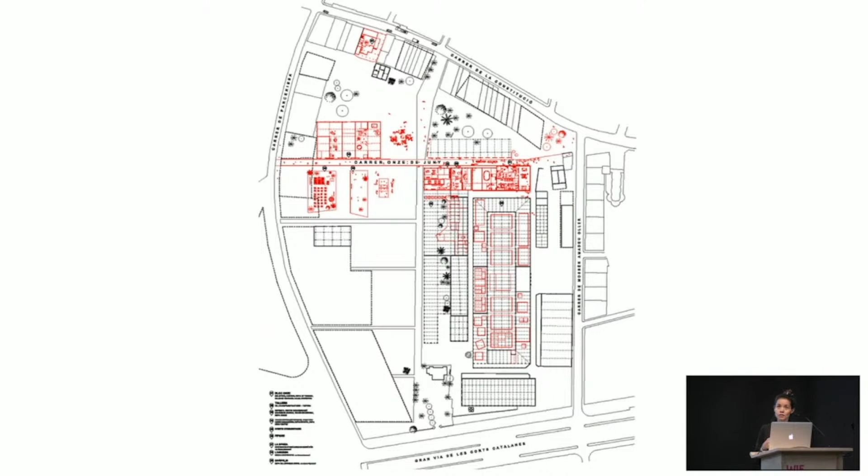And with that, it's the first kind of spaces and projects, initiatives that were colonizing this huge area, which was also in a change from the private to the public, just waiting for the public to have the resources, the initiative, the ideas to start doing that.

It was an opportunity for us to understand new protocols of understanding the provision of architecture with the people, the skills, the materials, and redefining needs and programs. And basically it was also the seed to understand how Can Batlló could become a cooperative neighborhood.

It was also a moment where, precisely because of the dismantling of the welfare state in Spain, in the neighborhood there was a movement and different projects trying to understand how we could bring solutions from the cooperative sector — in a way, how we can solve individual needs through a collective response. It was the opportunity to bring to practice, in the realm of Can Batlló, all those ideas.

So that's why when we were talking about housing and the policies, we were in a state that was basically in between the market and the state in the production of housing. So within the context of the cooperative sector, social economy, and the community, we were trying to build this idea of the third sector also as an agent, this idea of citizens as instigators of this new emergent model of cooperative housing.

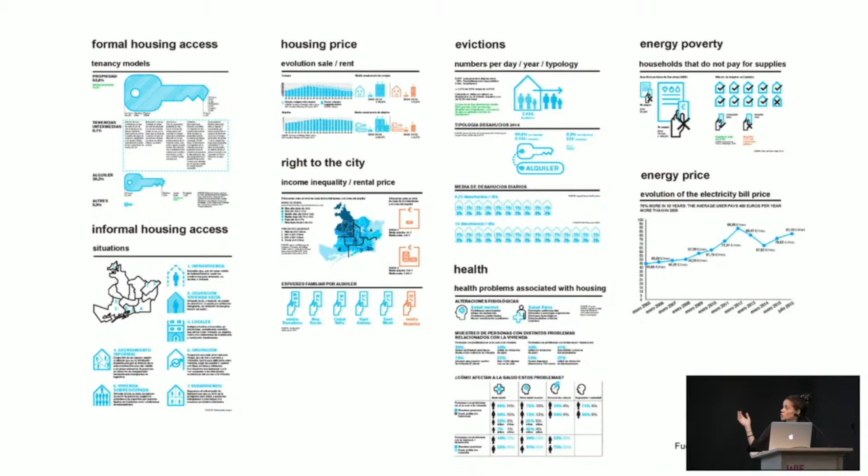Basically, and I'll try to go fast, this idea of this new cooperative housing model—it was a model of cooperative construction of housing. Once the housing was finished, the cooperative was closed, the property was divided, and it became just private housing. That's why we call it a new cooperative housing model based on collective ownership.

This is precisely the key point in our context: people as inhabitants, as members of the cooperative, have the right of use—an unlimited right of use of one apartment—but cannot speculate, because the owner is the co-op.

And the co-op is a non-profit co-op, which is also a mechanism that allows cooperative housing to develop public land in the city. And this basically had as a consequence, or as a potential, this idea...

That this is not speculative, it's led, or at least has started to be, a model led by the community—affordable, and trying to be as inclusive as possible in every kind of development and initiative, sustainable in the broadest way I was presenting, and replicable.

The idea was we don't want to generate just a project in Can Batlló, for example. We really want to understand it as a model, to see that there is a political impact of each decision, from the funding to the architecture, and really want it to be something that can be adapted to different contexts, different communities, and different parts of the city, even the Catalan or Spanish context.

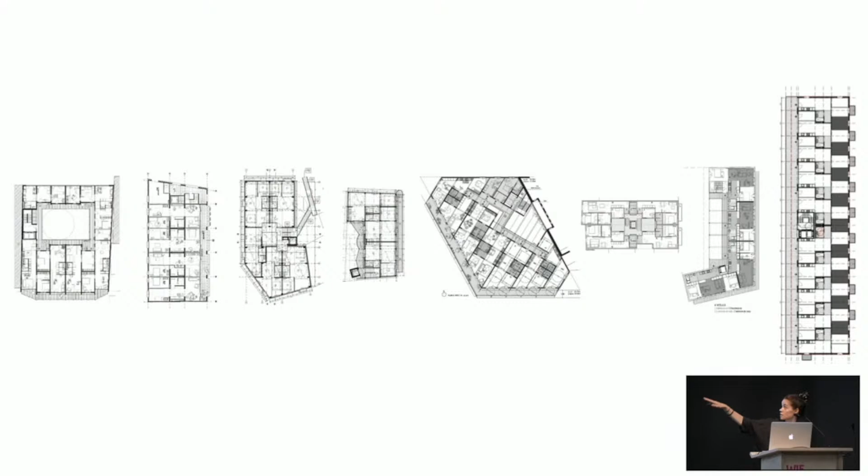And so this was how we entered into this idea of cooperative architecture. And basically, through the process of La Borda, which is what I will present, is the opportunity to understand a space of innovation in the production of housing. And this is something that with the same values, we had the opportunity to develop different variations. I think this is La Borda, and these are the different housing projects we are developing, but they're really based on the main ideas, which are totally linked with this idea of the model: self-development, collective ownership, community interaction, sustainability, and comfort and affordability, and how we can give a response from architecture.

And the first point, crucial and different from the typical procedures to produce public housing, is that we know the user and they're involved in the process. This is key to really challenge regulations, standards, and mindsets. And I think without this point, it would not be possible to really build La Borda as it is.

This idea of an open infrastructure, following Habraken, is like a support that can change through time and adapt to the community, offering different typologies and different programs even through time. The idea of a new program, which in Barcelona was something totally new - we didn't even have a laundry - so it was a step forward to start imagining certain common areas.

A process of awareness, like how people in this process are more aware of how we are living, the environmental impact of all these actions, and how we can be critical about the construction, the use, the lifespan of the building, and this idea of an active user with a passive building.

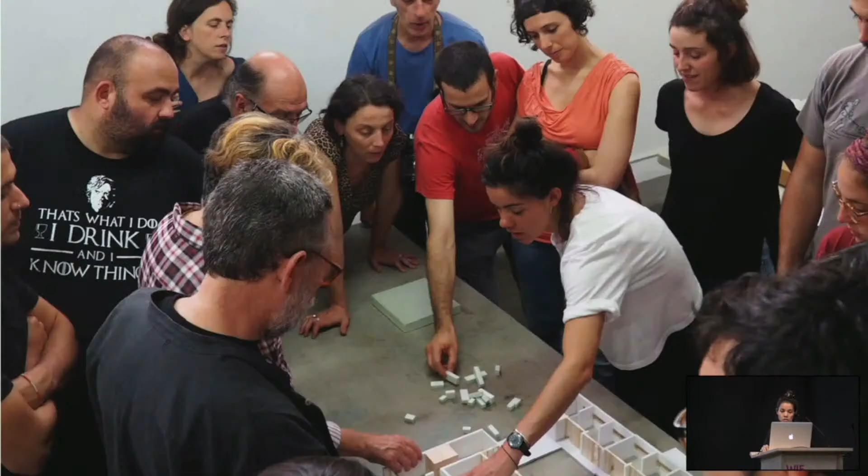And this was key also to really decide and do what we did. So establishing these new tools, these new spaces, the language, the models, and how we can also move as architects to new formats.

Starting with a survey of the context, the user, understanding the real need, and how can we redefine the conventional user of the family prototype for collective housing, and also how we can understand the economic impact of housing and energy.

This is part of this process of discussing continuously the priorities and strategies of the building, from a flexible housing system to a really passive building to reduce the energy cost, and other data that was crucial, like mobility.

We managed to change the regulation of parking after a huge amount of work with the technicians of the administration. So also this idea of the responsibility to push for certain regulatory changes that has an impact beyond a single project, to the city.

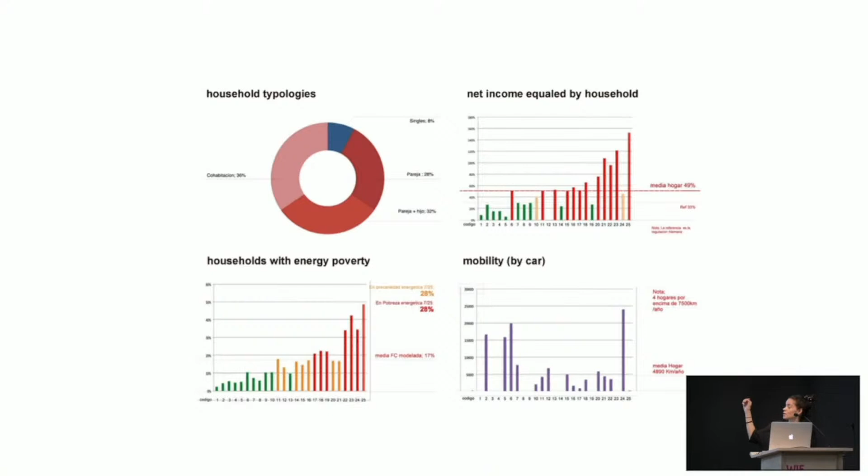This was basically the idea: to reduce the impact of the construction of the parking, to have more budget to really invest in other parts of the building, and also provoke or promote a more sustainable model of mobility.

And this idea that we have a specific surface, how we can distribute it, and how the appearance of these community spaces and community areas is also affecting the characteristics of the housing.

So we are not building fewer units, we are maybe building a bit smaller, but because we are collectivizing services and parts of the program. This is also part of this strategy of reduction.

And when we are applying a laundry, and I will talk about this at the end, when we have a laundry, for example, we are reducing the consumption of energy and water.

We can be more aware of certain practices, and all these reflections from the program to the construction were part of the environmental goals of the project.

And because of the budget, we really focus on energy, the reduction of the energy demand, and the reduction of the materials, as something also really visible as a new way of building.

And just entering the building. This is a process that is really present, and we are doing it again and again with each community, with each urban plot. I think the process is being replicated in a way.

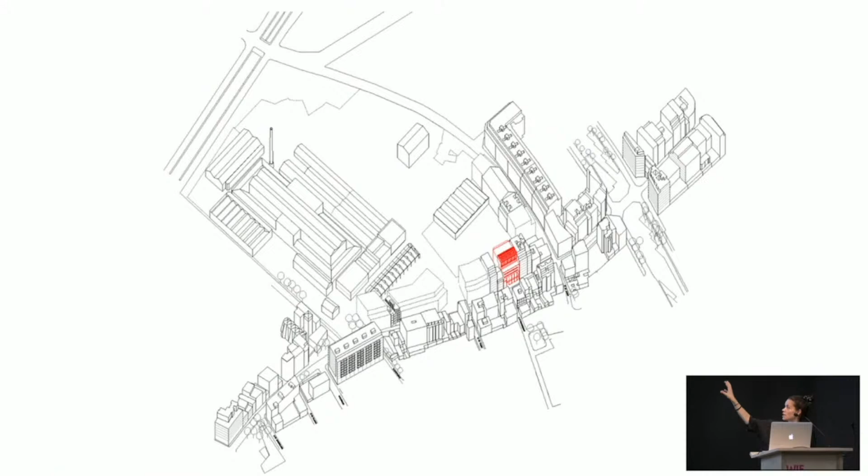And when we arrived to La Borda, this industrial area, it was again this idea of which spaces do we have in the neighborhood and in the area that we cannot duplicate or replicate, and which spaces are part of these different levels of community.

This idea of understanding the building as a transition from the public, even opening a public passage to really connect the future area of Can Batlló, organizing the common areas in the ground floor and first floor on the north facade, and then arriving to the most private areas and the units in a building which was really deep, 24 meters, so this need for a courtyard.

But it also became the core of the community, in a sense of belonging in a social way, but also as an environmental device.

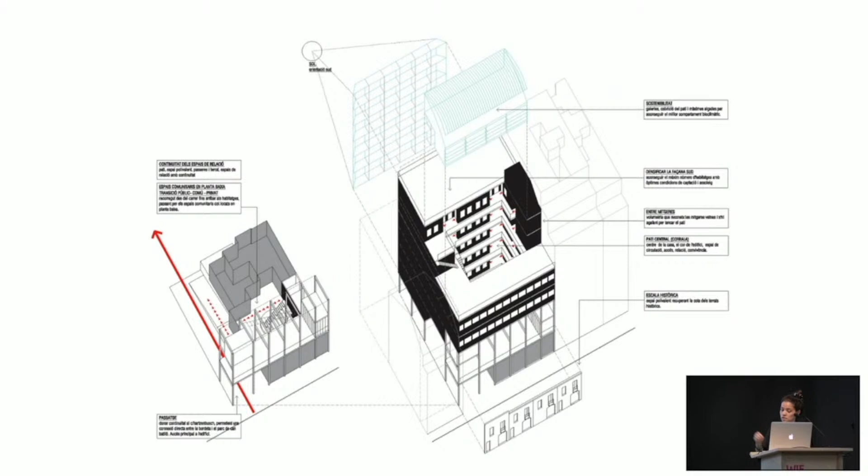Once we close it with this greenhouse, this also became a collective energy saver device, which was reducing the envelope of the building, making it more compact, which was also a reduction of cost, and also making all the spaces in different levels and floors easy to appropriate all over the year. And also this idea of densification of the south facade, and understanding the transition in terms of publicness in the north facade and the facade to the street, but also allocating the flats in the upper floors to have maximum comfort.

So this kind of unbalanced section with 24 out of 28 units in the south facade, and 2 more in the upper floors, and this idea of a device that's the core of community activities, circulations, and informal relationships, but also a space that has a climatic behavior, helping in summer and winter to reduce demand and increase ventilation.

And it generates different spaces of comfort, from the common areas to this multi-purpose room, to arriving at the terraces and upper floors.

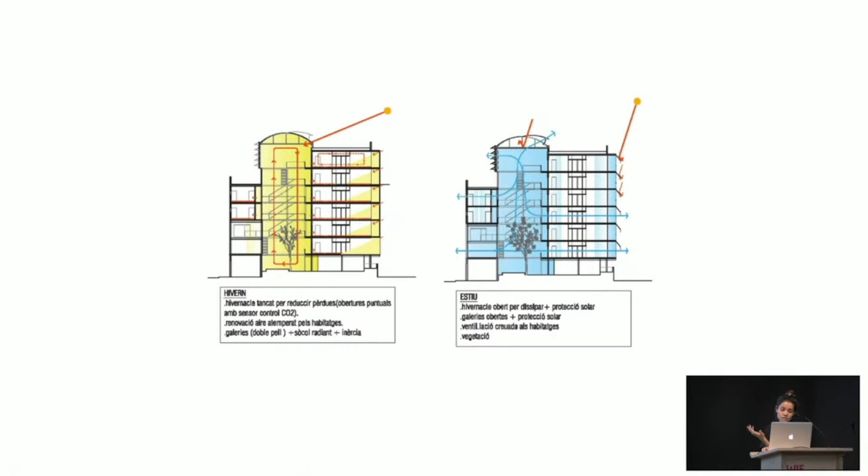So once the strategy in terms of volume in the city and environmental performance was defined, the last part of the design was establishing how we would define the typologies. The idea was to establish a matrix of non-hierarchical spaces that can be interconnected in different ways, generating several typologies using a kind of legal tool.

But this was also something that allows the cooperative to manage it through time, to change with simple mechanisms the configuration of a housing unit, which in the regulations and bureaucracy of Spain is quite complicated.

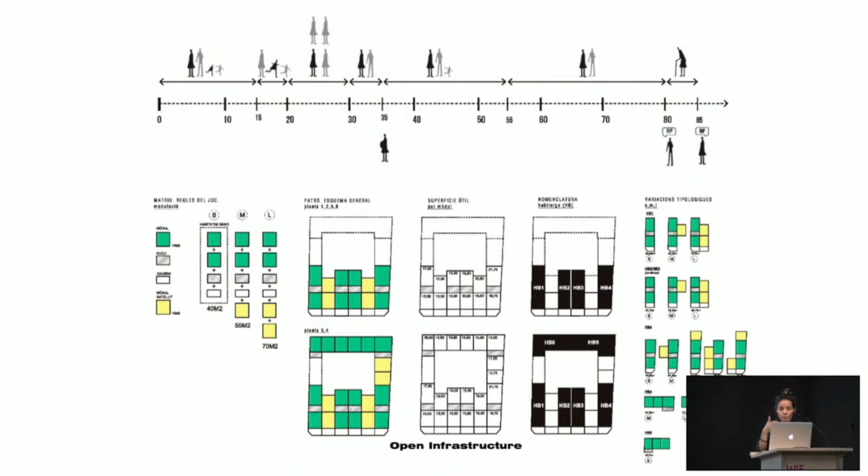Once this matrix and system was defined, it was a matter of establishing different levels of participation: the position of the installation core with the bathroom, the position of the kitchen, and then the users will use the spaces based on their specific needs and programs, through slight elements that they themselves provide, regulated by a manual that we discussed with them.

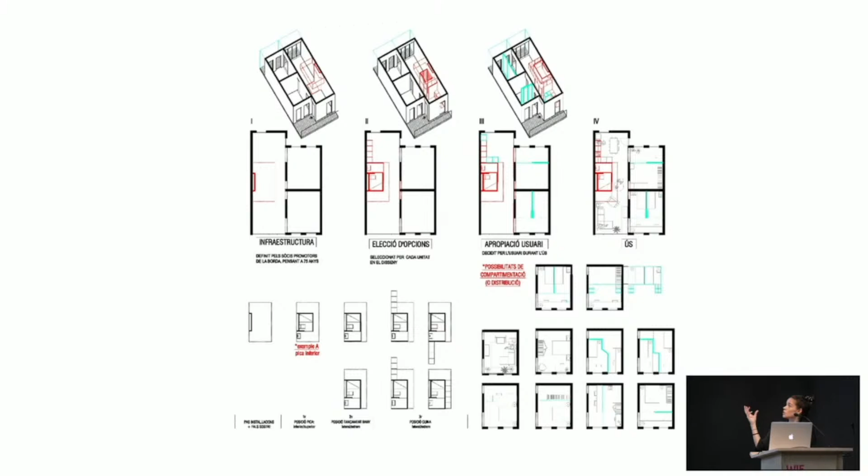So we set certain rules to define this naked infrastructure and these different levels of appropriation and participation, and also a strategy to really reduce the cost of the interior layouts.

And here it's how we arrived at this kind of collage of different typologies, different units and configurations, with a quite systematic structure, where the typology system became the structure itself.

And here it was part of this idea of sustainability and responsibility. The cooperative really wanted to show that another way of building was possible. It was a mandate for us to work in different scenarios, from concrete to steel structure to wood, and with a really low budget, to try to propose a CLT structure.

Basically, because of these domestic spans, like 3.6 meters, we defined 12 centimeter wood walls and also slabs of 12 centimeters. Once the structure was defined, also taking into consideration that the typologies can connect or not, it became a system of openings and walls.

Once the wood was defined, the distribution and the building were defined. It was also an opportunity to understand when we can reduce the insulation, because there's no thermal connection between the terraces and the facades.

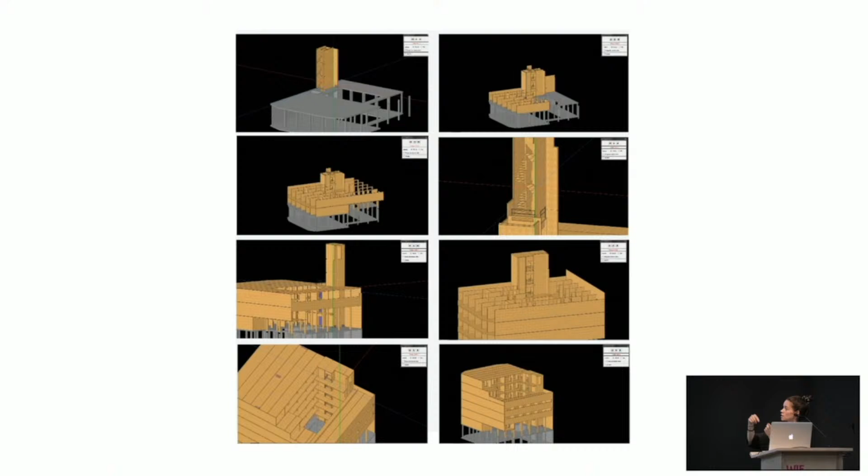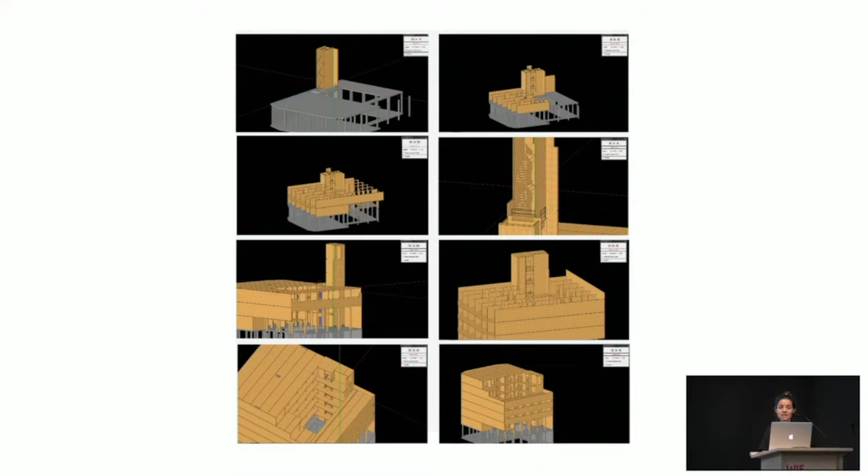So it was also a way to understand how we can build in another way, because we use this material, and with this kind of economic detail approach, we can build a project like this at 850 euros per square meter.

So basically the idea was to invest in the structure, in certain elements, but then use technologies and systems that we know are cheap and affordable, from Lacaton Vassal and other references. So this idea of beauty and aesthetics is totally linked to the idea of affordability.

And basically just some images of this ground floor with a cooperative of organic food, also a project of the neighborhood, this public passage that will connect to the park.

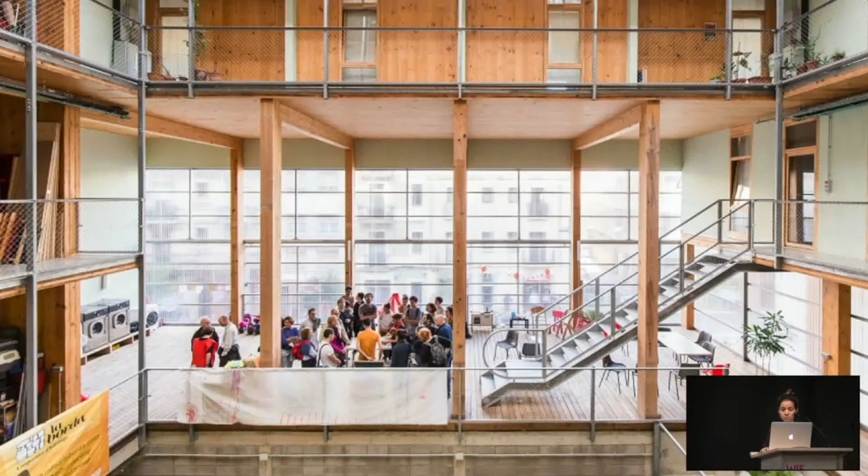And also we start to see this multi-purpose room that, in summary, is totally linked with the public realm and the city. This courtyard with all the parking bikes behind us is the condition for not having underground car parking. This connection of the common area with the future park arrives at this multi-purpose room, the future laundry, reflecting this idea of non-finished construction and phases.

So this also challenges a bit the idea of what a finished building is. It's present in the building as a process of finishing through time, and also as a way to learn the real needs, and to be really active as a community in order to understand if something has to be changed, doing maintenance, and even adapting certain previous decisions.

So this is the future laundry, the guest rooms on the first and second floor, arriving at this connection through the courtyard, to the terraces and spaces inside, because these areas inside the greenhouse are quite warm in winter. So there are different spaces with different conditions of comfort throughout the building to move through even during the year.

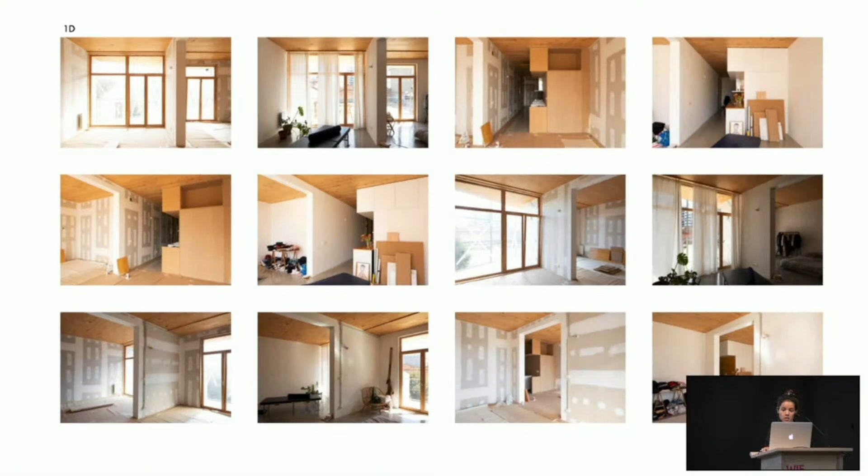And when we arrive inside the flats, there's this idea of naked infrastructure and really simple detailing - basically just concrete for inertia and mass, also because of fire and acoustic regulations, with different layerings of wood in all the walls. But we have wood in the ceilings because it has this hygrothermic comfort, and in Barcelona the humidity is really present. It's regulating, and the sense of a drier environment is really present, so it helps a lot.

And every user was finishing, painting and finishing these spaces themselves, so they became super different. This is just one example with the kitchen in the middle, and this relation with the south facade with really simple systems of shadow - this idea that the user has to open, ventilate, move the curtains - arriving at this south facade, which is quite different from the north facade.

Also with this idea of Barcelona and the blocks of Barcelona with a quite urban facade, but then an interior facade full of galleries, balconies, which is something that we really like. But suddenly the south facade is the facade to the park, so it was kind of the rear facade, but it's becoming the main facade of the building.

And just to end, I wanted to mention the last point - I'm almost at 30 minutes. So as learnings from the experience, we talk about a cooperative housing model, about cooperative architecture as a learning process, but the conviviality is what brought this idea of cooperative practices as the possibility to establish different protocols for sustainable living. And it was the opportunity to compare the different simulations we did of the building in the design phases and how they really reduced the energy demand and the energy cost.

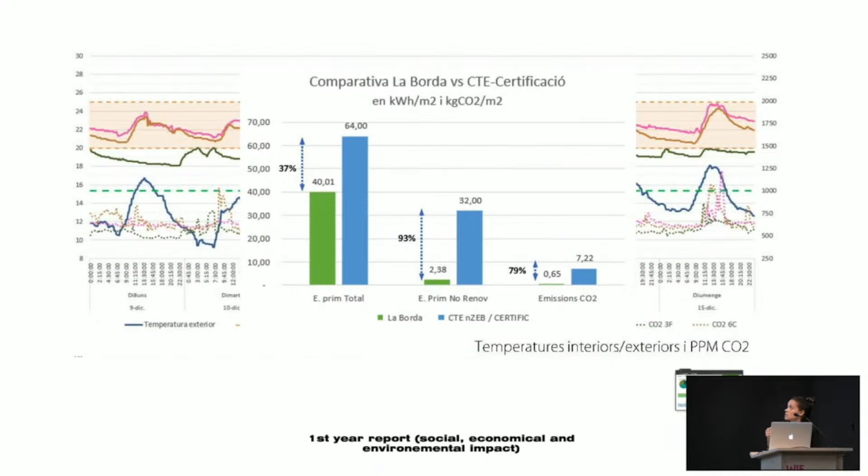And as I was saying, with the laundry, it was obvious there was an understanding of the process of using them, of analyzing how we can reduce the water, the energy, et cetera, consumption - even the temperature of the water, which was the highest consuming factor, the temperature of the water.

So this idea that we have the data, the information, and the space to decide and apply these kinds of measures. And suddenly arrived also the finishing of certain common areas, new protocols of use, and starting also to understand the impact in terms of consumption - the food, the production, the energy. So every time, more and more, the community became stronger.

And then COVID arrived. And suddenly, and I will end with this video - I will take the sound, probably.

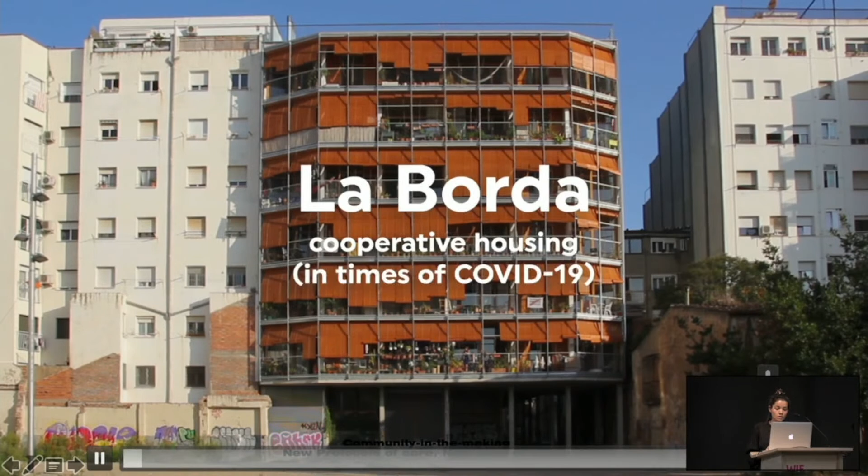The most interesting thing was to see how the community was able to establish new protocols of care, and how the building, with a connected terrace and common areas, allowed certain levels of relation with safety. The community felt absolutely privileged to have control of the environment that surrounded them.

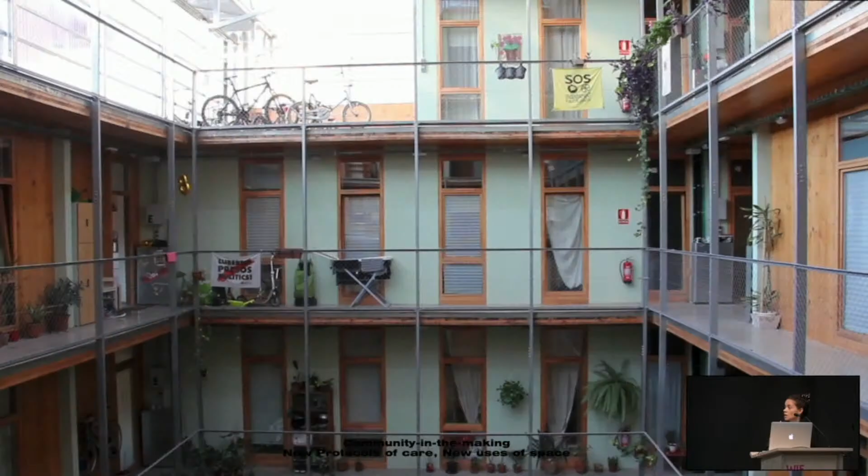Because in Spain we had a super strong lockdown. All families had to be at home for three months, kids without any kind of relation with the outdoor. So suddenly La Borda decided to understand a household as the building and develop their own protocols of care, solidarity, helping elderly people, helping people with specific needs, but also kids. There was even a project of a smaller school to allow parents to work at the same time, this idea of conciliation, which was difficult.

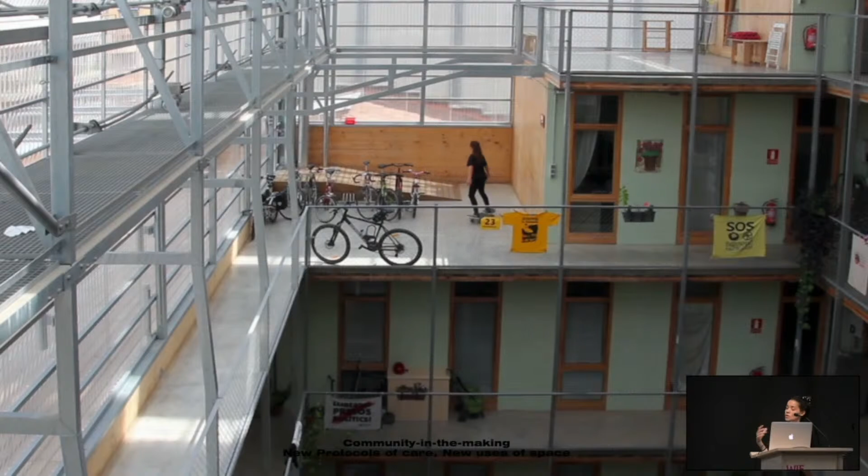La Borda became a gym, or even a concert hall where people were playing music, or became a space for dinner with distancing, but with this kind of social interaction. So it was interesting to see how the building behaved in this context. And I think that with that, I'm finishing.

This idea, the vision of La Col, understanding that these are learnings and modes of operation being applied in different spheres. The idea of understanding housing as infrastructure has also been applied to spaces of economy, an incubator of social economy led by the community, spaces of work in the city, of culture. So I think at the end it's about understanding how we can develop projects and initiatives from this social engagement. Thank you very much.

Thank you very much, Cristina. It was quite a lovely story and a lovely finish, showing how in times of crisis like COVID, it showed what the project actually is by definition of a household, and the whole building becomes, by definition, a household. I also liked the long story in the beginning, the diagrams showing how constructing this one building of cooperative housing actually constructed the whole policy of cooperative housing, which of course takes a long time. So I think we'll have a lot to talk about later here on the podium.

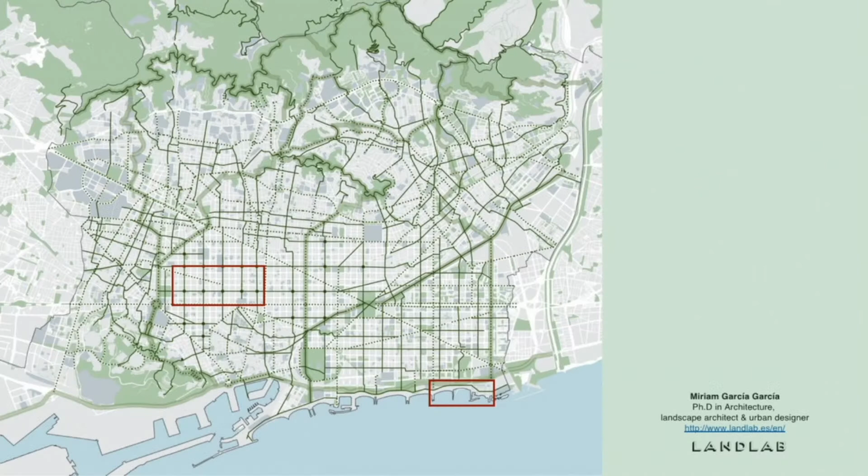Good evening, and thank you for the invitation to join this challenging discussion. I am going to share with you the process and implementation of two large-scale public space transformation projects in Barcelona, in which we are involved. Both are linked with the general title of the series, Klimawechsel, as a fundamental alignment shift in the design of public spaces by incorporating a long-term social and environmental agenda.

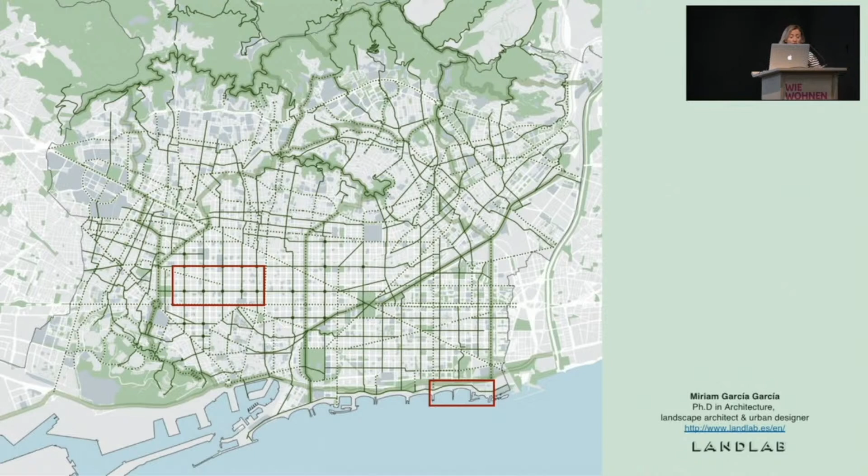So I am going to talk about the superblocks and also about the last area of the waterfront of the city of Barcelona, projects that are now in process. I imagine you have all heard a lot about the superblocks in Barcelona, but I just want to make a super quick introduction. First of all, we need to know that Barcelona is really a small city, 100 square kilometers and really dense. We are 1.6 million people, so it's three times the density of Vienna.

Barcelona is a city with really small and medium parks, but not large parks. The percentage of green space is 6 square meters per inhabitant, when the World Health Organization recommends more or less 10. So I would say that Barcelona is really a city of streets.

Many cities are trying to rethink the idea of superblocks, but superblocks are also linked with the density and urban framework of the city of Barcelona, and that makes sense. So from the very first beginning, the idea of the superblocks was something simple, just trying to transform the city into a green grid.

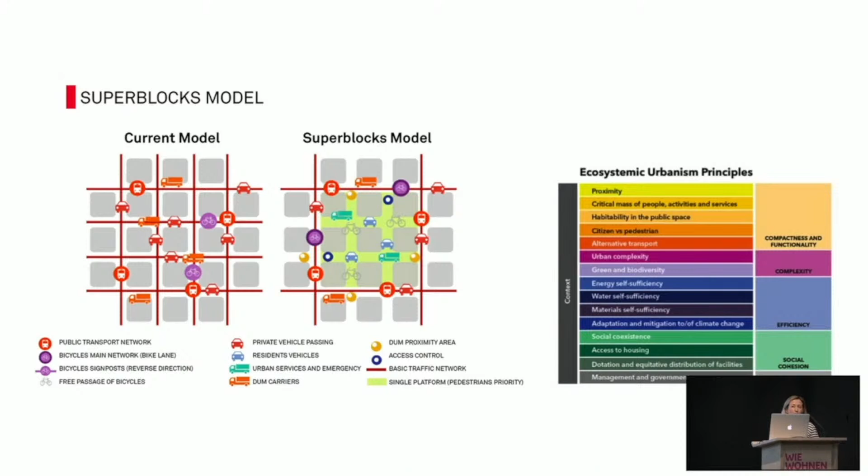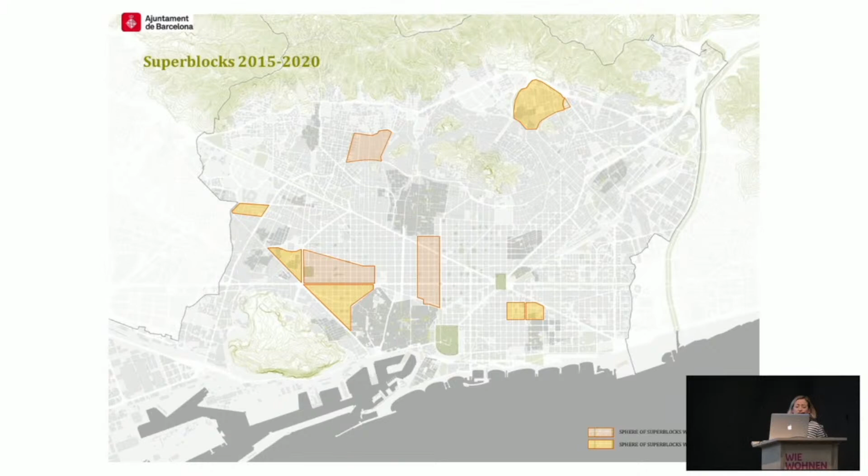And now, in times of systemic crisis of the planet, when we need to face climate change and biodiversity loss, it's also about trying to balance the metabolic behavior of the city. So this is a long story that started many years ago, and this idea of the superblock was tested in some areas of the city of Barcelona through this kind of successful tactical urbanism.

I have to say that I was not engaged in this part of the process, but I was living in one of the neighborhoods in Poblenou, and also my office was there.

At the beginning, people, I would say not everybody was happy with this idea of taking the cars away, so there was a lot of discussion and hard work from the city council in order to explain what was behind this idea of taking cars away and giving the city back to the citizens, but also the necessity to reintroduce and renaturalize the city.

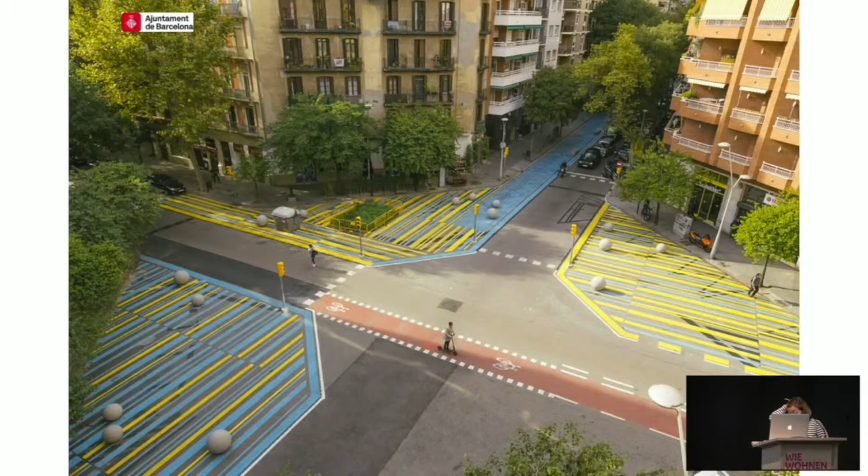Luckily, or not luckily, when COVID came, people realized the importance of public green spaces in the city. So after COVID, the city of Barcelona decided to move this idea of the superblocks from the tactical urbanism phase to the constructed phase.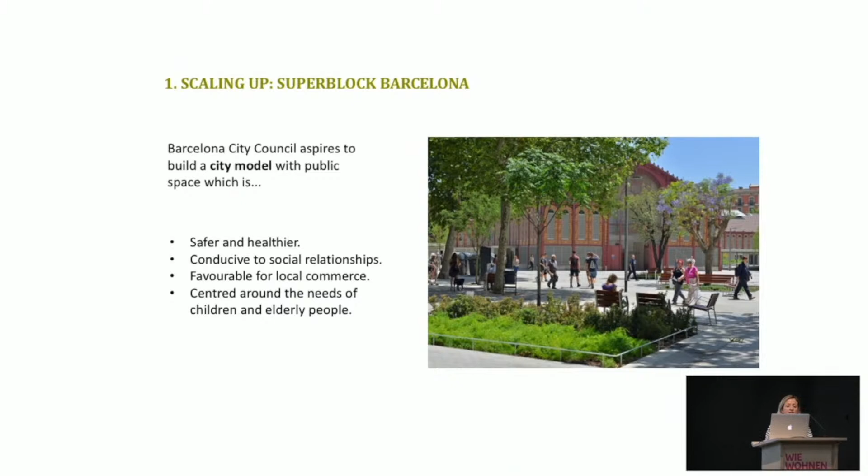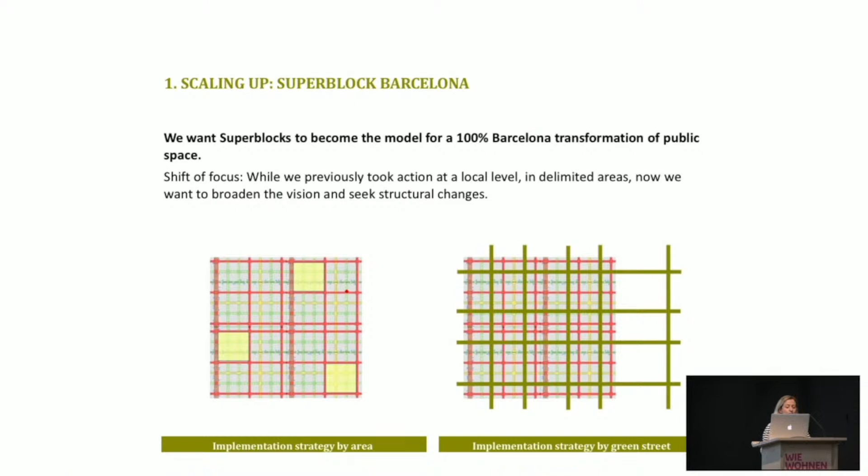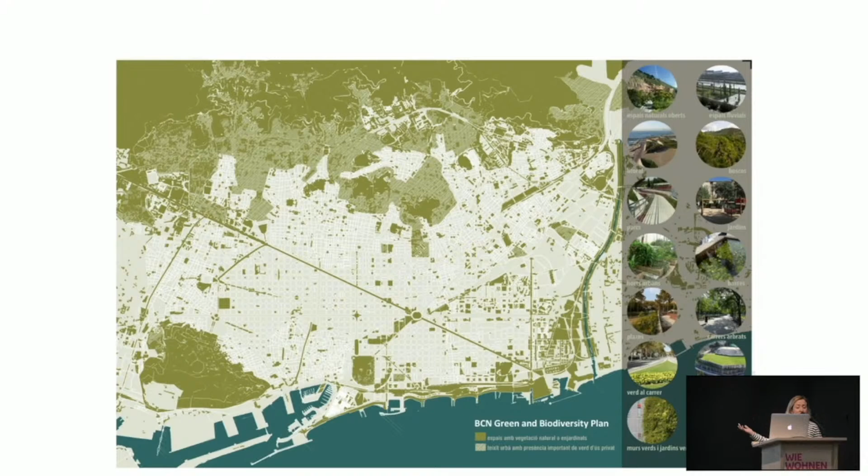But first, in order to do that, they decided to scale up the idea of the superblock of Barcelona. It was not only about the superblock, it was about the whole city. And in order to do that, this idea of the superblock was linked also with the green and biodiversity plan of the city of Barcelona, and also with the mobility plan.

So some of the main axes of the streets were chosen to be transformed into pedestrian streets. As you can see, from the ideal model to the reality, the superblocks are not all the same size, they don't have the same dimensions, because they are also trying to become green corridors, providing a kind of matrix of ecological and biodiversity support for the city.

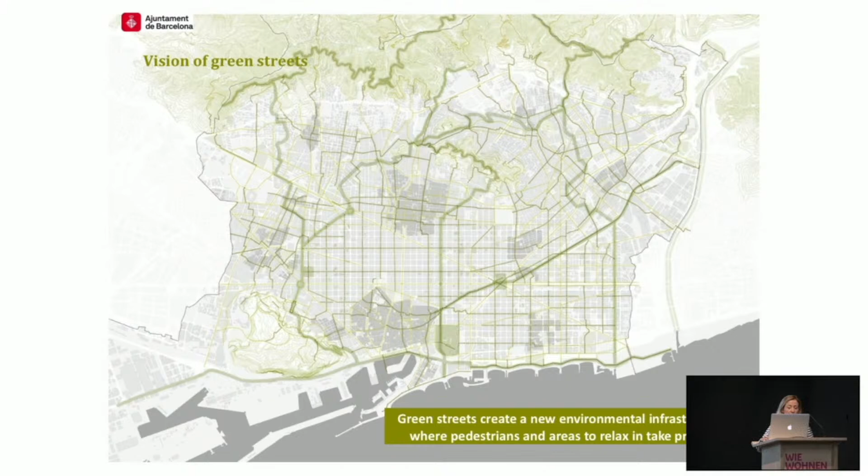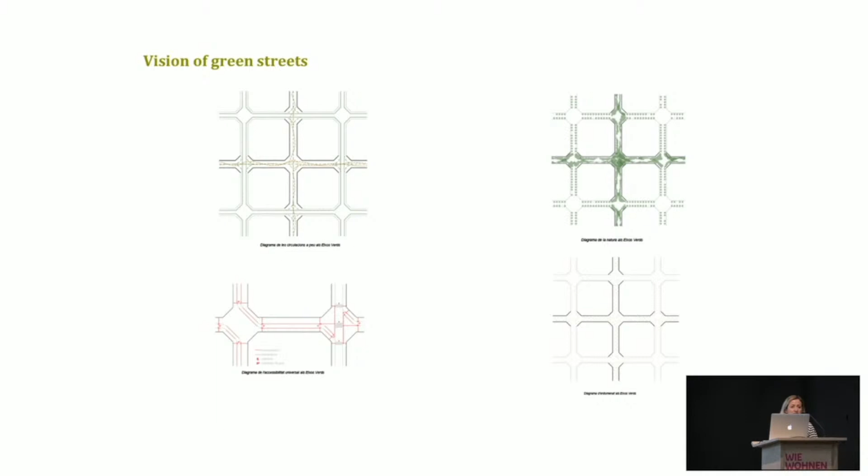And then, when you move that to the scale of the streets, you realize how important it has been, and you will see it in the projects, to try to introduce as much green space as we can, because we are not only transforming a street for cars into a street for people, we are also creating the ecological matrix of the whole city to face climate change, to improve the quality of the air, and so on.

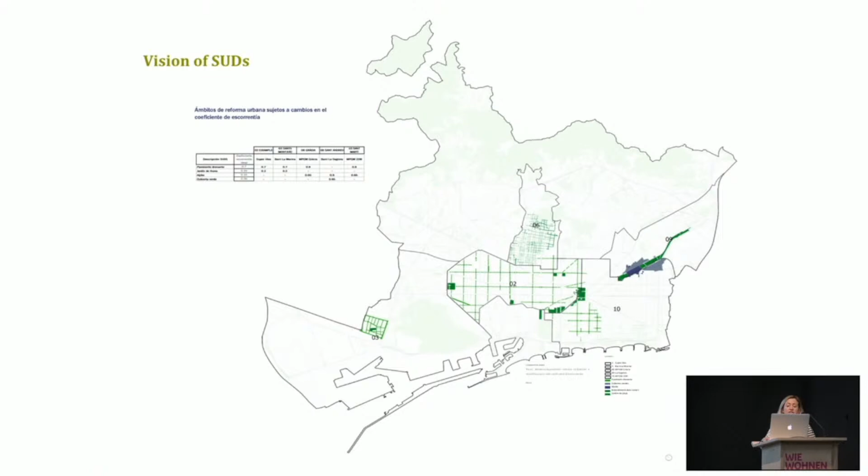Plus, this vision of the superblocks also merged with an idea and strategy of the city of Barcelona to face urban floods due to climate change effects. So there is a huge new vision and plan of sustainable drainage systems in the city that has also been integrated and mixed with the idea of the superblocks, trying to transform the urban public spaces into a kind of sponge matrix to face future floods due to climate change effects.

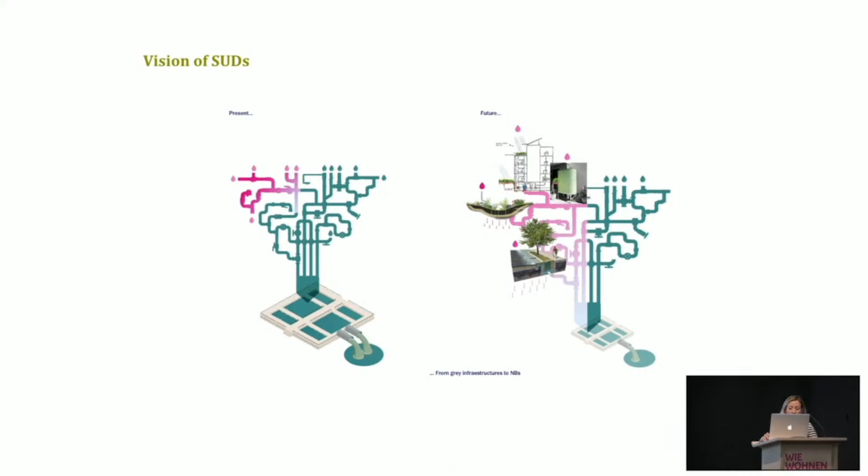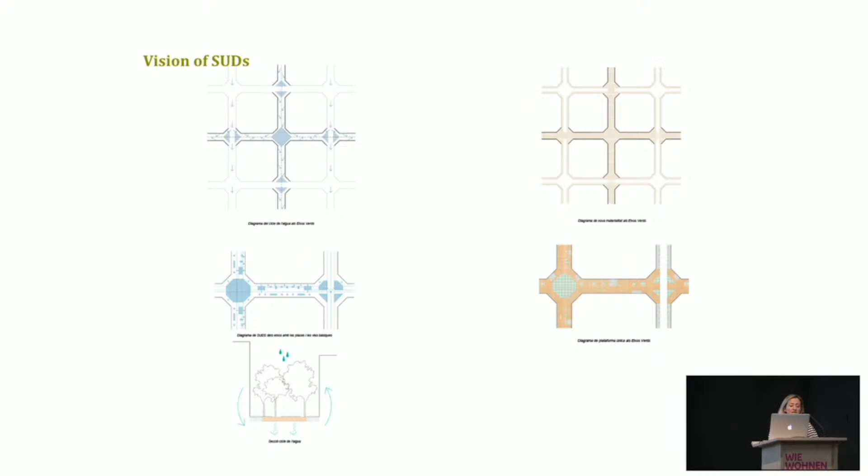Almost all the drainage system of the city of Barcelona nowadays is grey infrastructure, and the municipality wants to use green infrastructure as a sustainable, resilient drainage urban system. That means that the streets in the superblocks also need to infiltrate as much, and retain and infiltrate as much rainwater as they could.

So in order to put all these ideas into practice, the municipality needed to find a place to apply them. And the place was the enlargement of Cerdà, first of all because it's a grid, which is the idea behind the superblock, but also because there is an area with high levels of pollution and a high volume of through traffic.

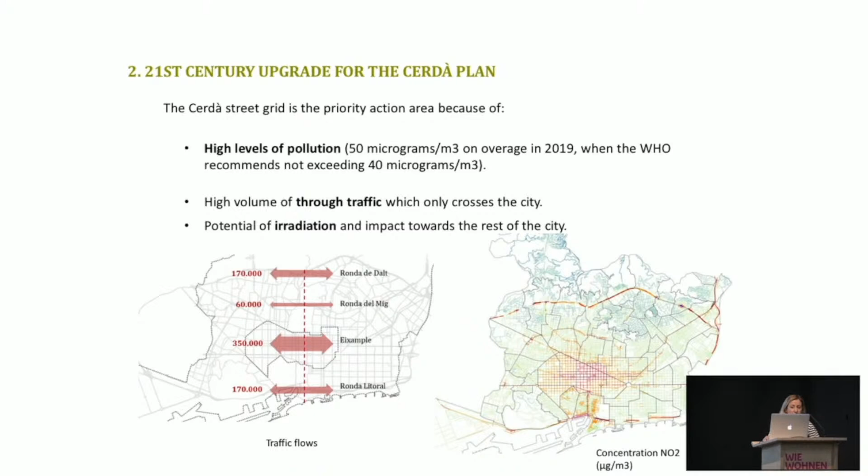So they decided to put this idea of the superblocks into practice in the enlargement, and in order to do that, they started a process of implementation. Well, you have the numbers here.

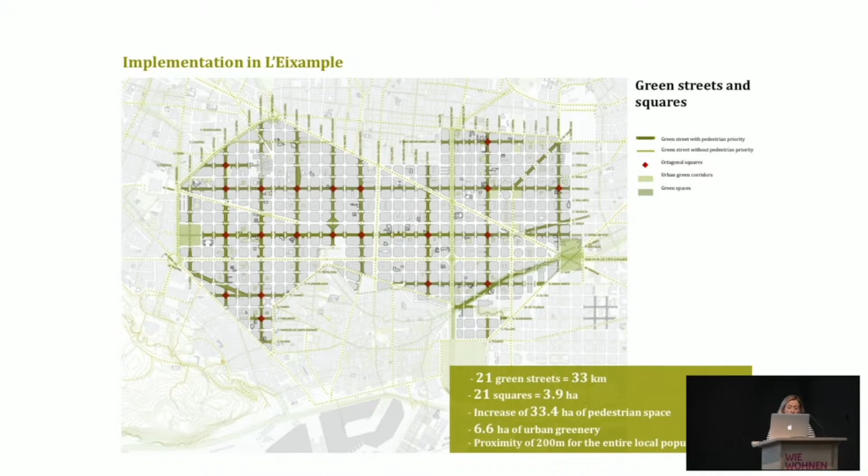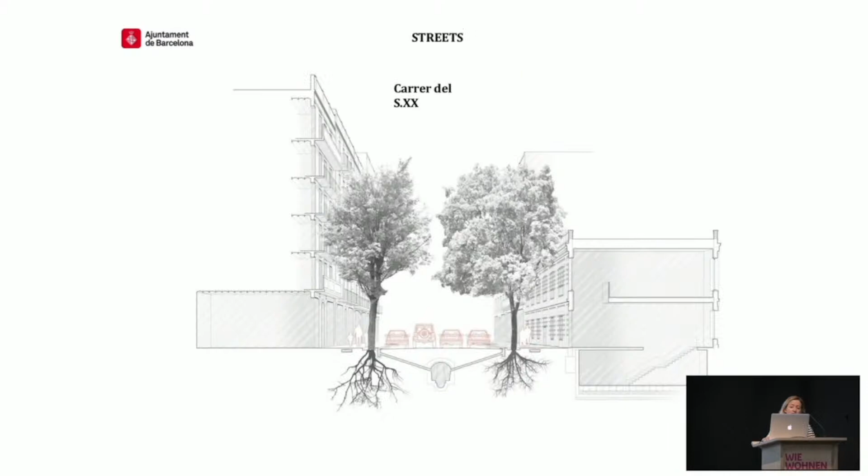So the superblocks in the enlargement are going to transform 21 green streets, and they are going to create 21 squares at the junctions of those streets. So the whole idea is to move from the streets of the 19th century to the streets of the 21st century, trying to mix all these ideas that I have been talking about.

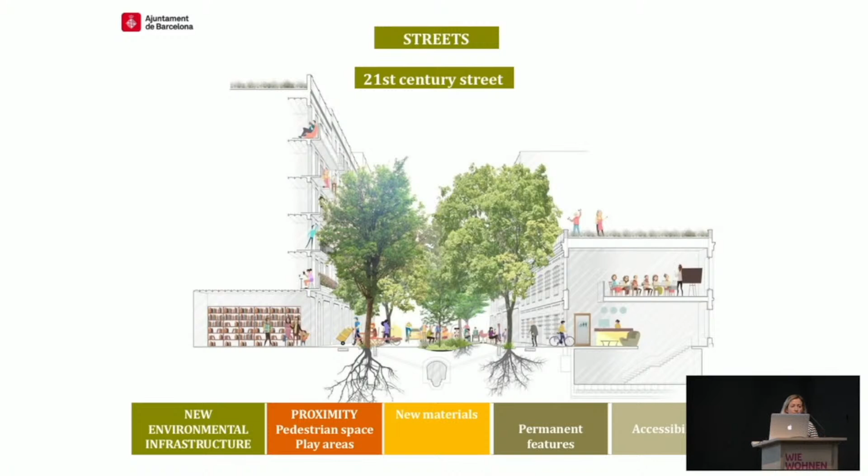Understanding it as a new environmental infrastructure that is super important in the city of Barcelona, as I told you at the beginning of my talk. Also to create a network of proximity, pedestrian spaces, and areas for kids to play. It is also a place to prototype and use new materials, especially when we are talking about sustainable urban drainage systems, and it's also a place for universal accessibility.

So we have the streets, and at the junctions of the grid we also have the possibility to transform these intersections into new squares that have more or less the same size as some of the squares of the district of Gràcia.

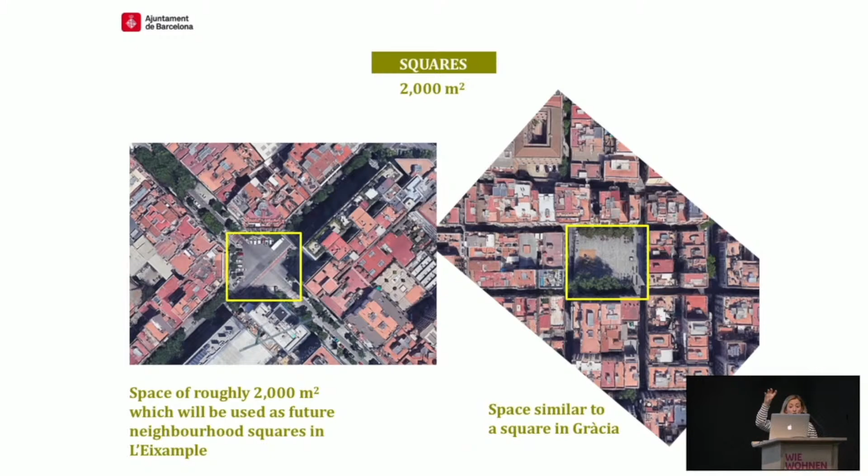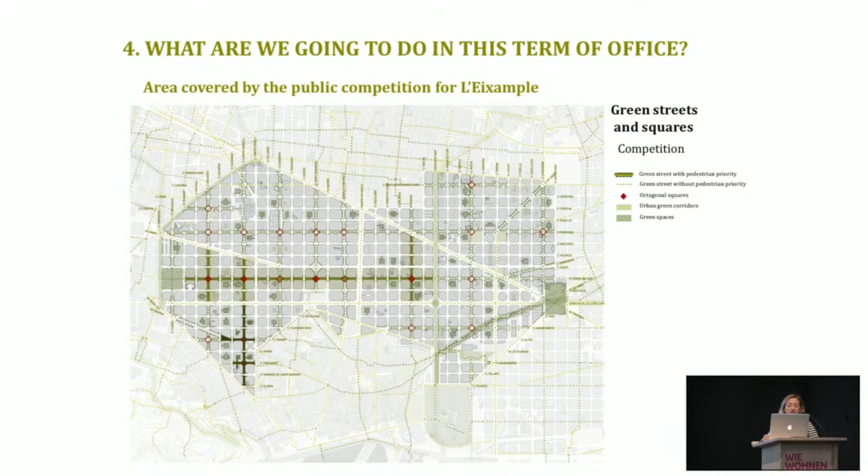Okay, so in order to do that, about a year and a half ago they launched a competition for the first 4 streets and the first 4 squares, the 4 plazas. So as you have seen, first there was a kind of technical strategy for the whole city, then tactical urbanism as a way of understanding and rebalancing the technical strategy, and then a design competition. And luckily, we won one of the squares, one of the plazas, and a new phase started.

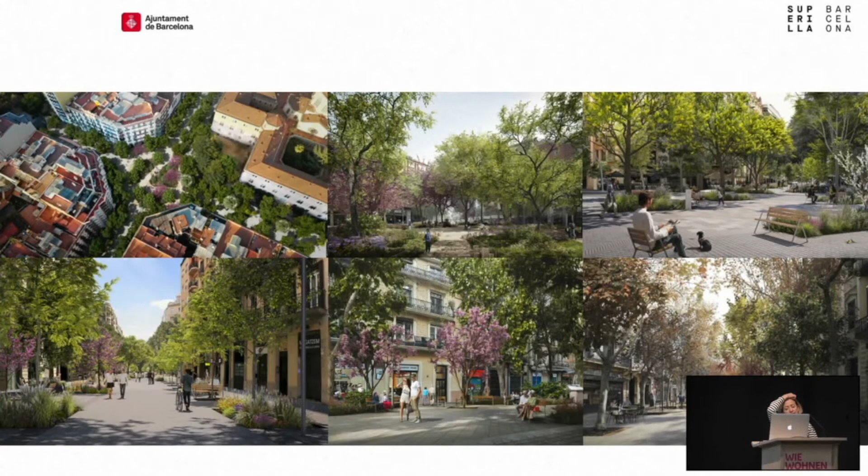So at the beginning, after the competition, the municipality decided that the teams, the 4 for the streets and the 4 winning teams for the squares, were going to work together, sharing knowledge but also creating a kind of collaborative decision-making process about the materials and the vegetation, trying to make a balance between the programmatic uses of the streets and the plazas, to give the whole urban project coherence and balance.

They also created a central project office and an advisory board. We used to meet every 2 weeks during 7 months. So all the executive projects, all the construction projects, were done and finished in 7 months. So it was really a challenge.

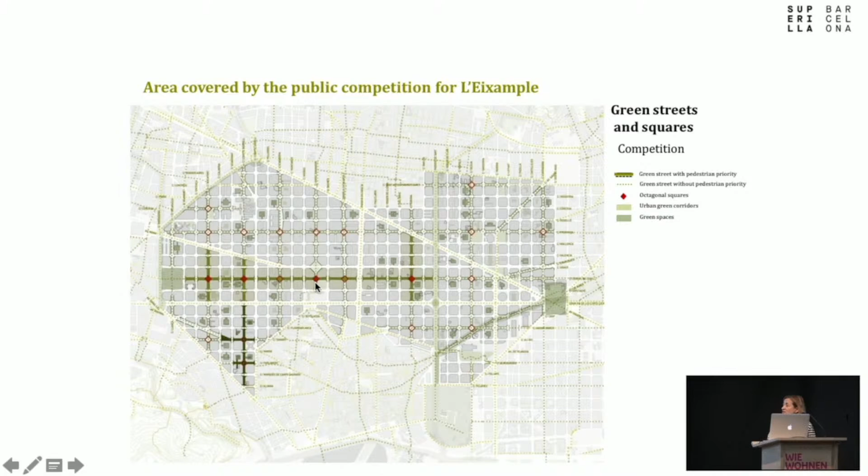And okay, I'm just going to show you the square that we are doing, but you need to understand it within this huge shift of urban model and transformation of the city. This is our small plaza.

And from the very first beginning, we also understood that we chose this square, this junction, because in the 19th century, the enlargement of Cerdà used to have empty, green gardens inside the blocks. But due to housing development and the market, they were infilled with other uses. The fact is that the enlargement of Cerdà now has very few empty inside gardens. The dots that you see are the ones that have been recovered after a big effort by the municipality during the last decade.

And we wanted to introduce this idea of a garden, not a square, also because, as I told you at the beginning of the presentation, Barcelona has really small and medium gardens but not big gardens. And this junction is close to the gardens of the University of Barcelona, which are quite amazing, and also the ones of the seminary, and also this big plaza called the Plaza de Letamendi.

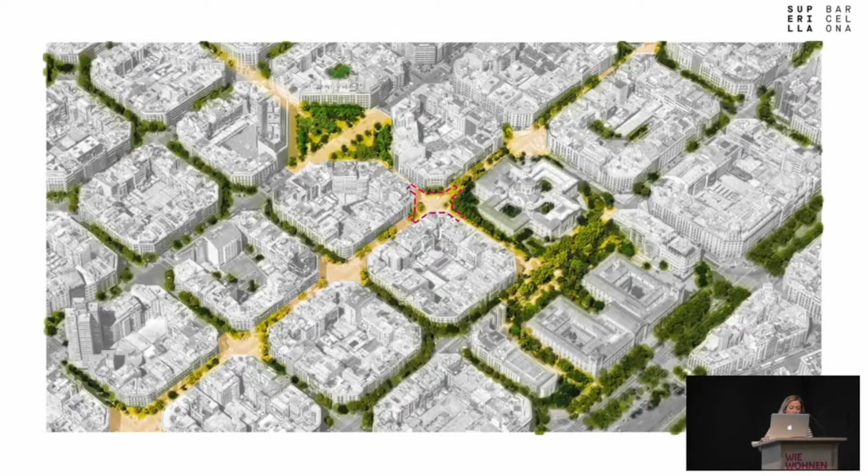It's not only about a plaza with trees or a street with trees. It's something that was unexpected in the city. So this is how this small...

area of the junction of those two streets, Consell de Cent and Enric Granados, looks today. And hopefully this is how it's going to look in less than a year, because the works have already started 2 months ago.

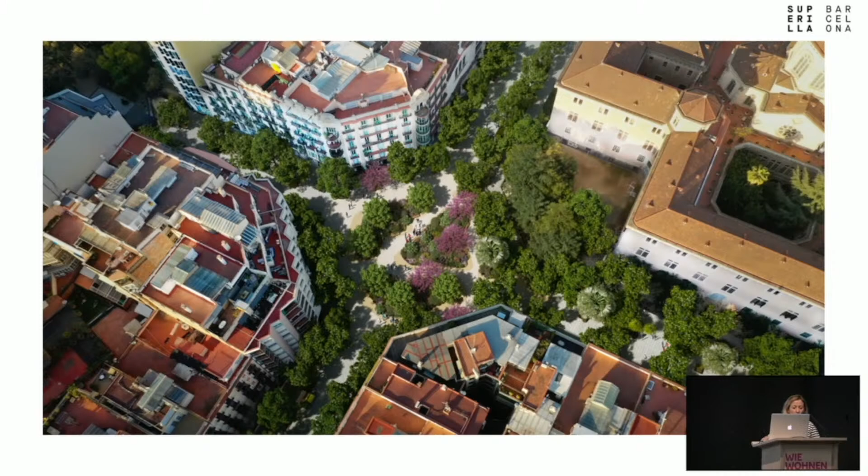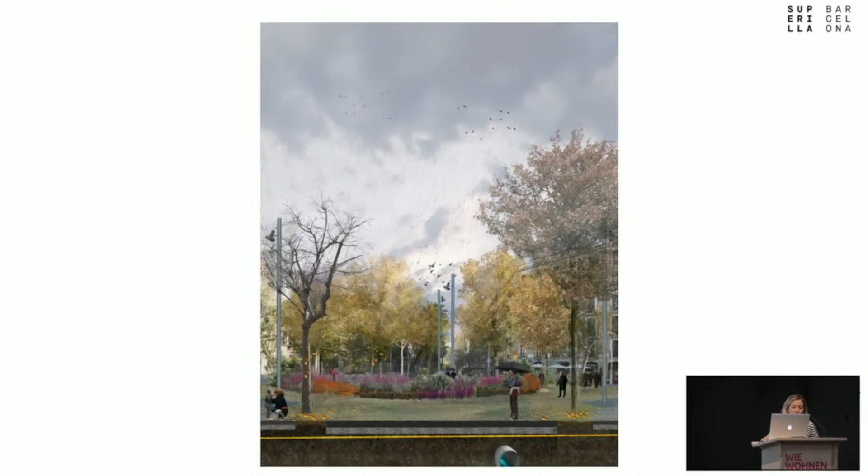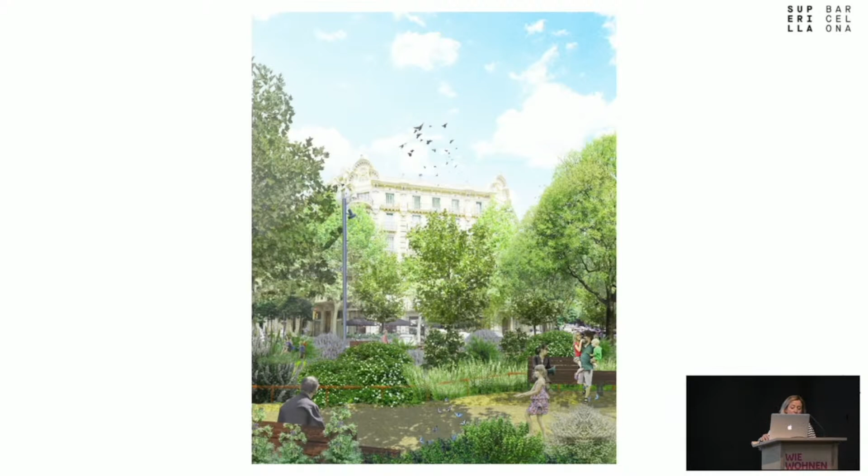You need to know that the enlargement of Cerdà is one of the most noisy areas in the city of Barcelona, and it's also quite monotonous. So we thought that introducing a kind of wildness in the center of the city could help us think about this future challenge we have due to climate change effects and biodiversity loss.

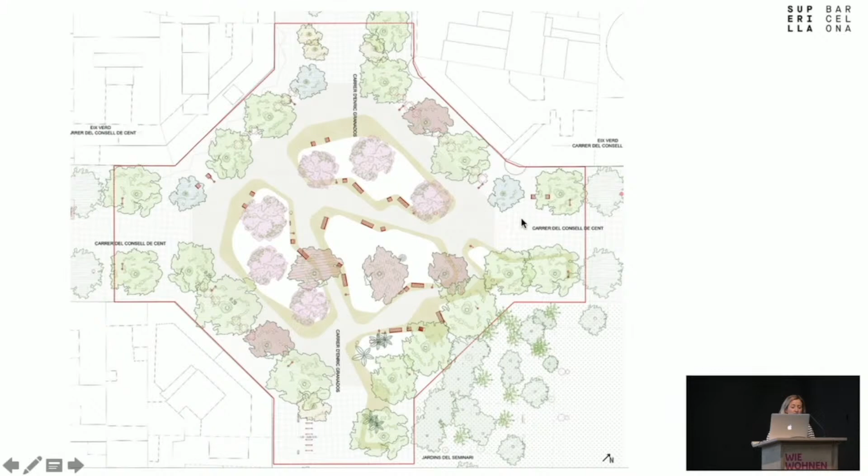That's why we also chose species that change with the seasons. The morphology of the square is also linked with trying to keep all the vegetation that we found in the place. But if you look at the section, you'll realize it's not a plaza, it's not only a garden — it's a huge sustainable urban drainage system.

It's about this idea of trying to retain and infiltrate as much water as we can, because all the data we have shows that in the future, at least in Barcelona, we are going to have scarcity of water in the summer period that is going to become larger, but then we'll have intense, small periods of heavy rains.

And the drainage system that the city has is not enough, so all the urban regeneration projects need to introduce this idea of dealing with the water cycle. So all these green areas, in fact, are designed to retain, clean, and then infiltrate the water into the aquifer.

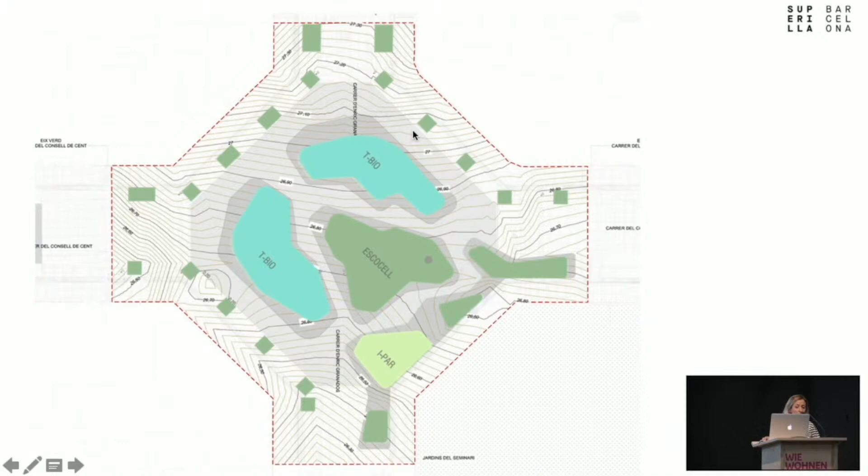At the same time, as you have seen, we are in these areas with the gardens of the university and the seminary. We also wanted, from the very beginning, to try to create a huge palette of ecological variability and vegetation. So we introduced in these different green areas a kind of botanical garden nearby the gardens of the university, a Mediterranean one, and also a rain garden.

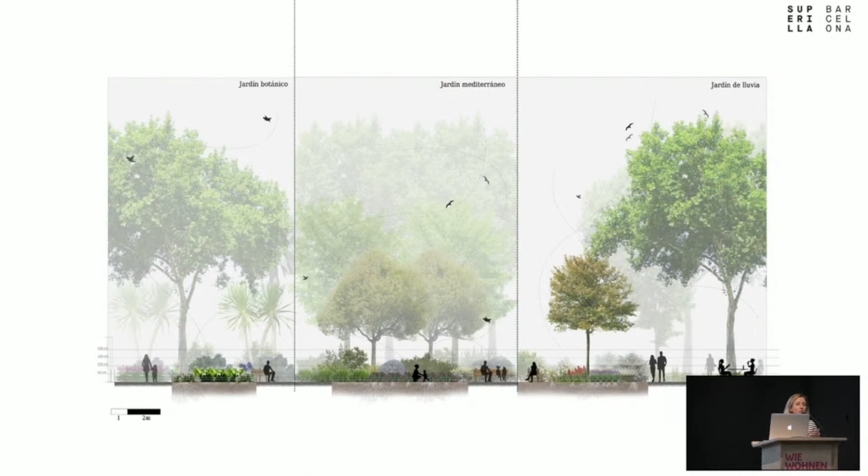Each of the areas was designed in order to transform the imaginary of green spaces, introducing wild species in the city, to let us think that in the future, green areas in the city would need less maintenance and less water. So little by little we need to change it.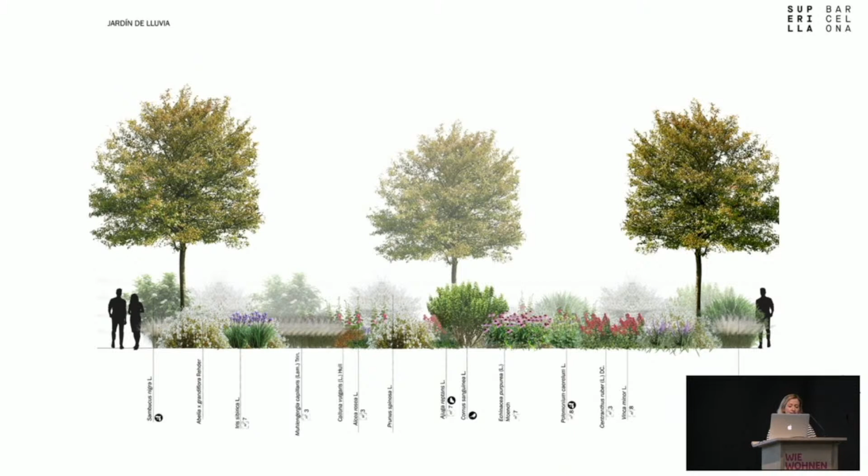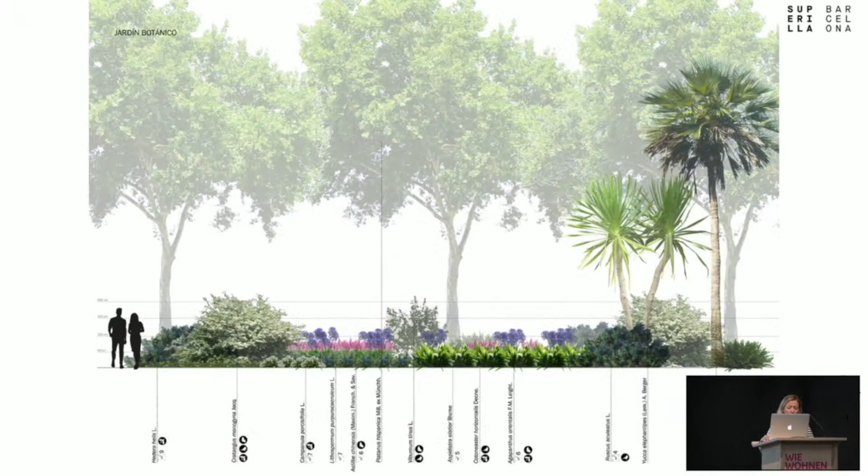But this is a really central area of the city, so we tried to make a kind of balance, and also take this as an opportunity to create areas for birds, butterflies, and other species. Each of the species we chose is linked with these ideas.

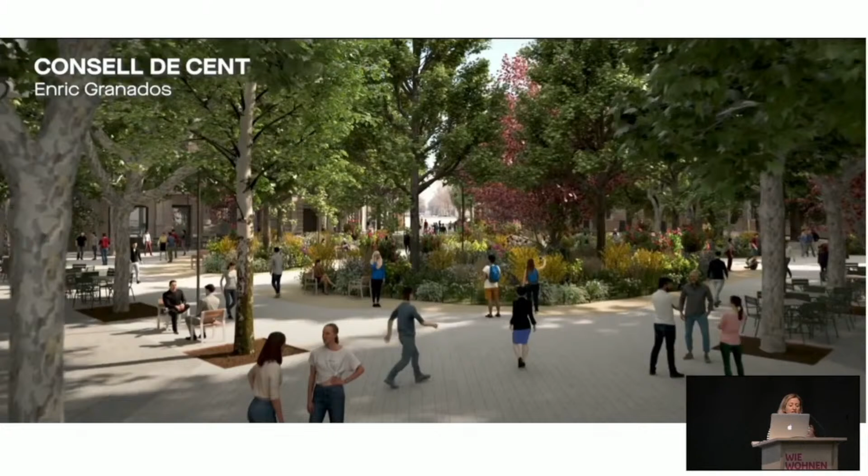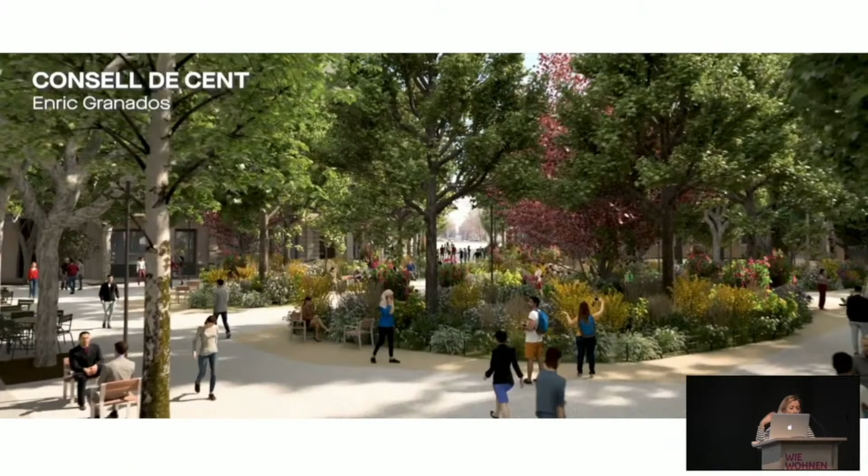So, hopefully this is how it's going to look in 7 months. This is how we envision the idea of, instead of having a plaza, trying to create a social hub in between the big green grid of green spaces of the city, in the enlargement of Cerdà — giving back to the citizens the garden that, through many years of housing development, had been lost.

And to move to another area of the city of Barcelona that we are working on. I know that here you don't have waterfronts, but you have riverfronts, and you also have lakes. It's also interesting to...

think about the future in all these areas that are linked to water, because due to climate change effects, all the water bodies are changing. So in a way, they are laboratories of change. All the borders we have between the land and the water, in this case between the land and the coast, are areas where we can think about the challenges we need to face, and new typologies and new ways of doing that.

So again, the municipality of Barcelona is transforming this area of the city. It's the last area of the waterfront of the city of Barcelona that needs to be, let's say, reurbanized.

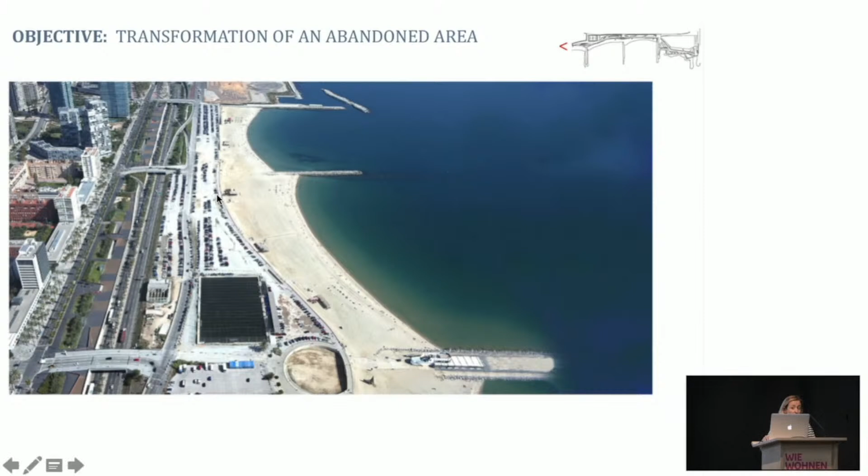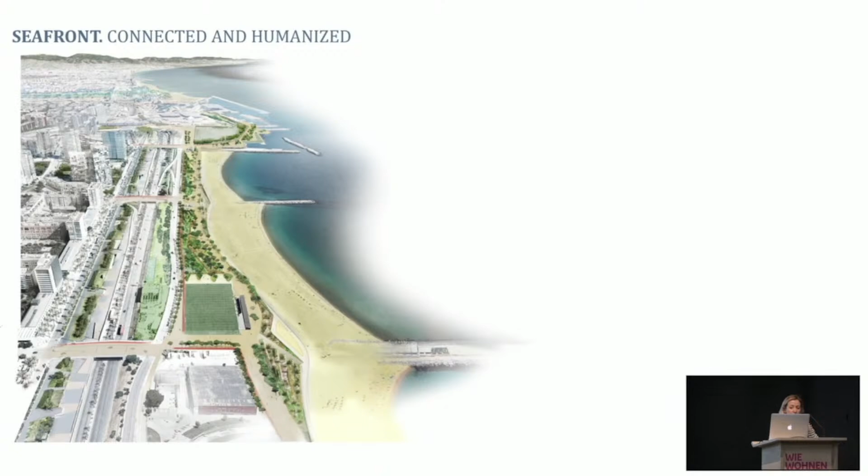Nowadays, as you can see in the images, it's a parking lot. So the idea is to transform it into a big park. I have told you that we don't have big parks in the city of Barcelona. Also an area with good climatic conditions for the population in these heat waves. But there is a huge problem: as you can see in the image, almost all the coast of the city of Barcelona is artificial. And the two rivers that we have, the Besòs and the Llobregat, are canalized, so they are not carrying sediments at all.

So in order to have the beaches, we need to nourish them every 2 to 3 years. And due to climate change effects, what we know now is that by 2100, with, let's say, 64 centimeters of sea level rise, the erosion is going to be 40 meters. So that is to say that in Barcelona, all the beaches of the city are going to disappear because we don't have the money and energy to nourish them every 2 or 3 years.

And that is a huge transformation, because the beach is not only a place for sunbathing in Barcelona, it's also a place for people to gather, it's also a place for people to do exercise and sports. And this project is trying to envision a different way of creating a waterfront.

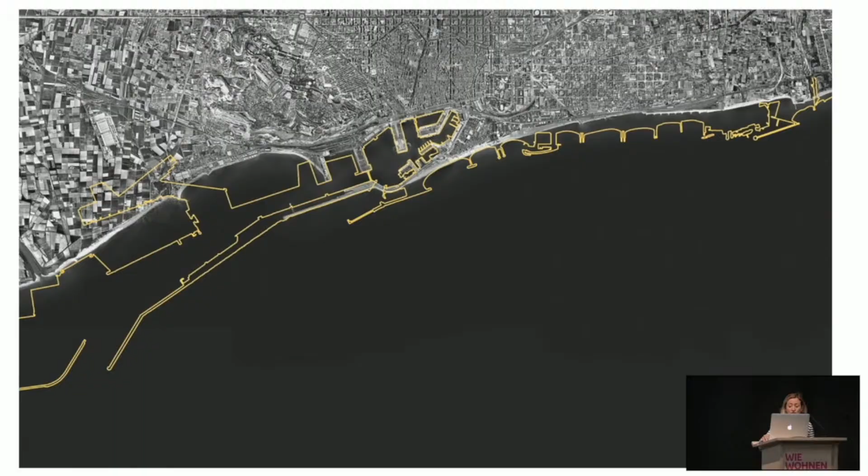But the main strategies are here. Again, as with all the public spaces that are being transformed in the city of Barcelona, there has been a huge effort by the municipality to talk with the neighborhoods and with the people, and to understand how public spaces can help with the facilities that they need. For example, new areas for sports or for education or wherever. So there was a long period of, in a way, making this kind of co-production.

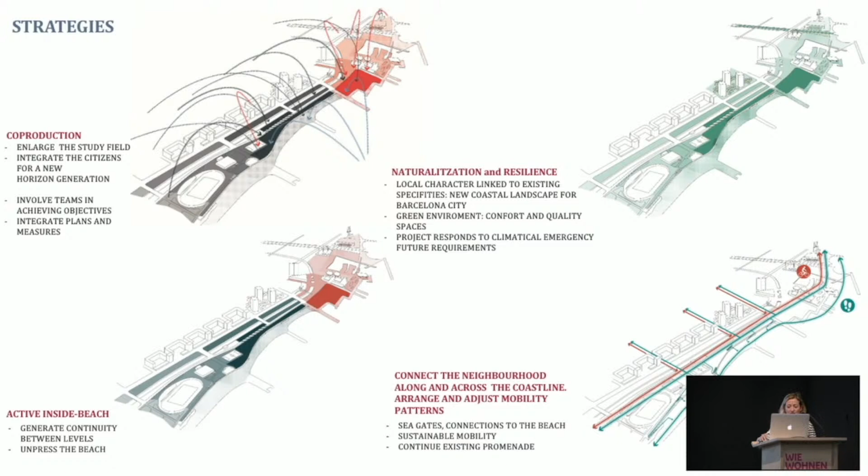And the other challenge was dealing with climate change effects. So it's how to do today a project that is going to be transformed due to climate change effects. So the main idea was to move all the activities that we have on the beach into the park. Today, the beach of Barcelona has a width of 26 meters, and I don't know what width it will be in February with the next storms.

So here you can see this idea of creating not only a park, but a kind of artificial, elevated, and resilient beach, understanding that this waterfront is going to be transformed, not now, not in 10 years, but in the future.

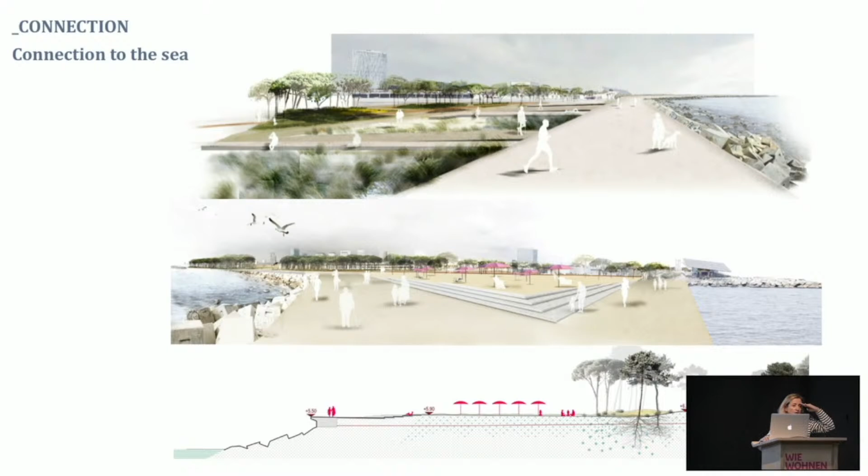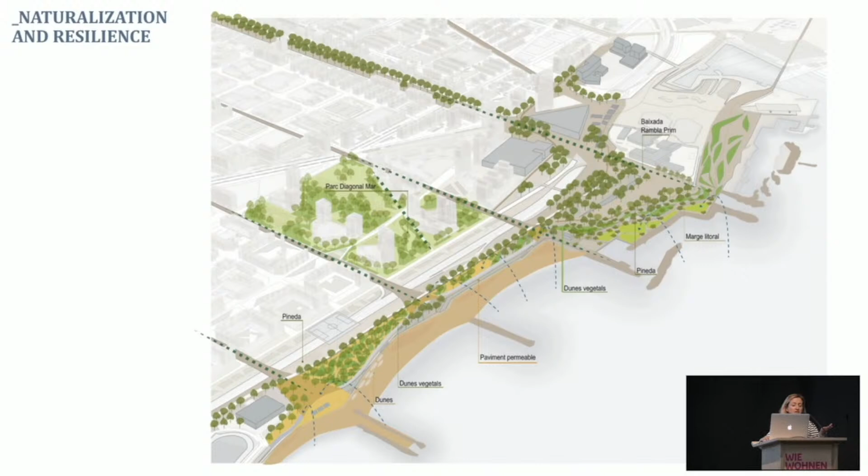So what I find beautiful about this project and the project of the superblocks is this idea of, let's say, utopian pragmatism. It's kind of solving today the problems that people have, but taking into account the future and the changes in the future. So for the first time in the history of the city of Barcelona, the waterfront is not going to have a wall

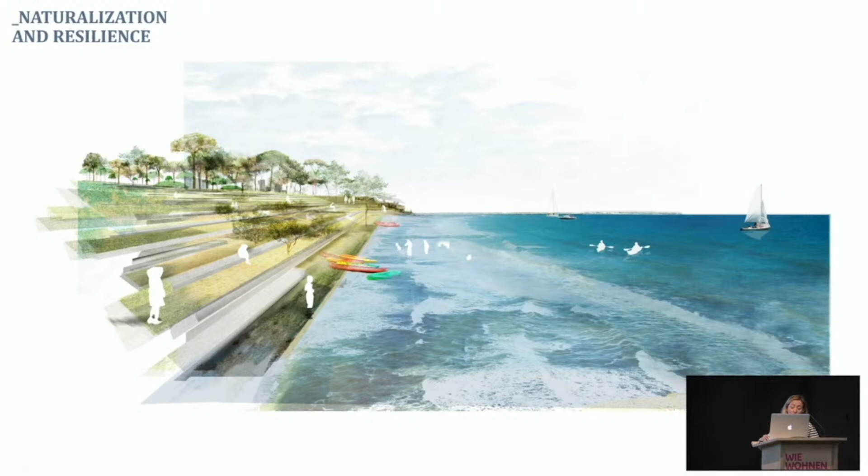in between the city and the beach. It's going to have a lot of these kinds of stair terraces that will allow people to engage with the water and with the beach, and that in the future, with the changing conditions, if we are not able to nourish the beach, it will become the edge of the city, although they are not today. So as I have told you, that means moving a lot of activities and introducing into the park a lot of activities, programmatic uses that today are done on the beach.

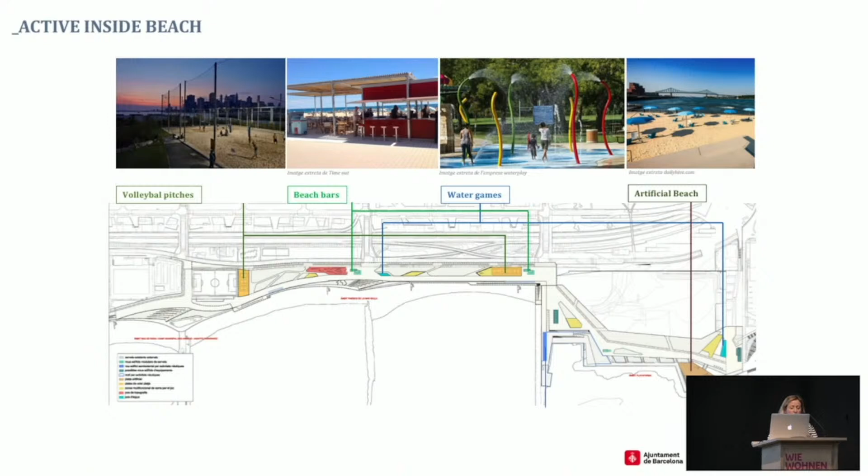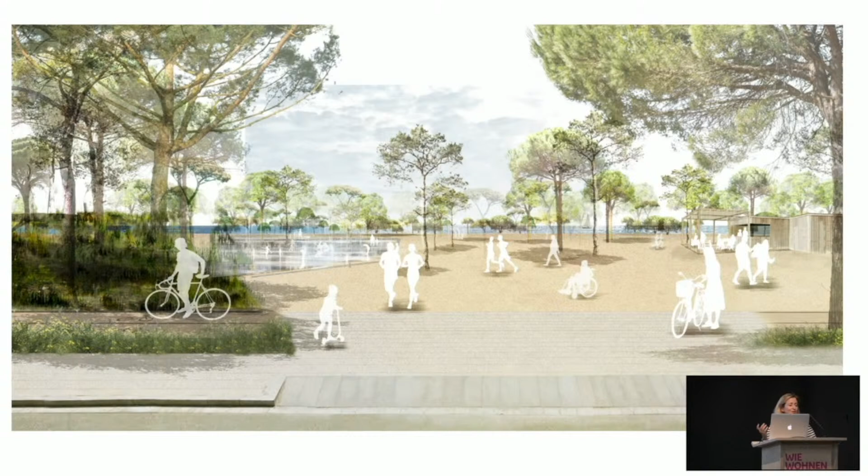And I think that this is the same strategy, as I have told you, in all the areas close to the rivers, close to the lakes, in all these areas that are going to suffer huge changes due to the effects of climate change. So it's not going to be totally a green park. It's going to be like a kind of hybrid, a kind of prototype beach park, something that we don't have in the city of Barcelona.

So it's also cool to think about new typologies of public spaces, and to think that even today we can invent new types of huge, large public spaces.

So, just to finish, what I want to say is that I believe that the design of public space today necessarily implies a certain utopian pragmatism. Solve the daily problems of the citizen today, and at the same time think about the planetary limits and the future impacts of climate change. And this is only possible if you have a systemic vision of the city.

It's not about urban design. It's about the metabolism of the city today and tomorrow, and the evolution and design of that transformation as a resilience process. If you have that model in your mind, it's easy to work with people and to reach agreements about how to transform and change not only the materiality, but the programmatic uses of the city today. That's all. Thank you.